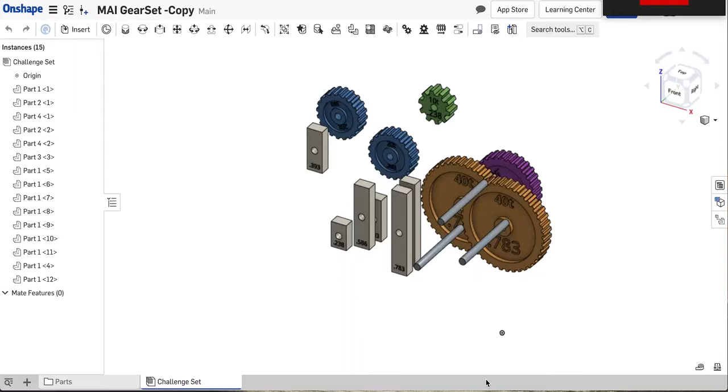Hey guys, we're gonna make a little gearbox here, okay? I'm gonna demonstrate how this stuff works one more time, okay?

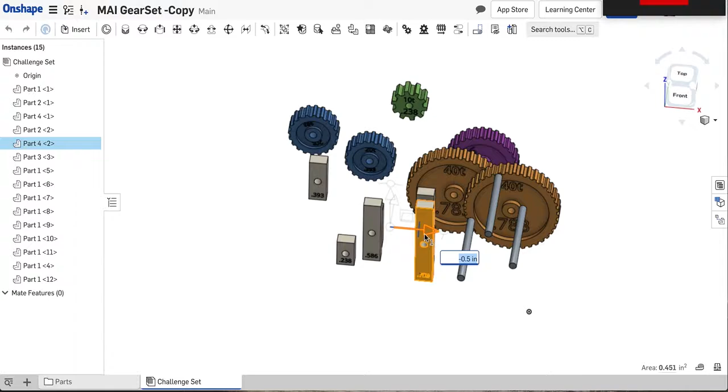So here we go. We got 4 different gears, different colors: 10 tooth, 20 tooth, 30 tooth back here, and 40 tooth. Got a couple axles, couple blocks, okay, that we can use to assemble our parts together. Notice if you wanted more of any part, you can insert those parts, and they're all here. Okay, but I don't think you'll need to for our examples, but feel free to experiment.

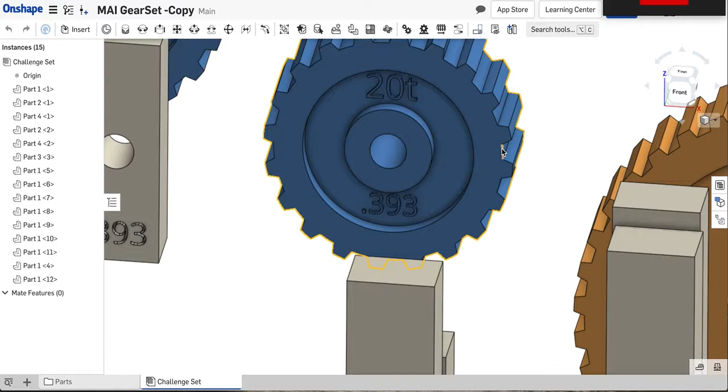So the basic rules are for this type of thing: use the block with the same number as the gear. Remember, the number on the gear is the distance in inches from the center to the root of the gear tooth, okay? And that distance matches the center of the block to the bottom and or top of the block. These blocks are symmetrical. So by using the blocks on the gears and then stacking the blocks, we can build our setup. So let's make a mesh of a 20 tooth and a 40 tooth.

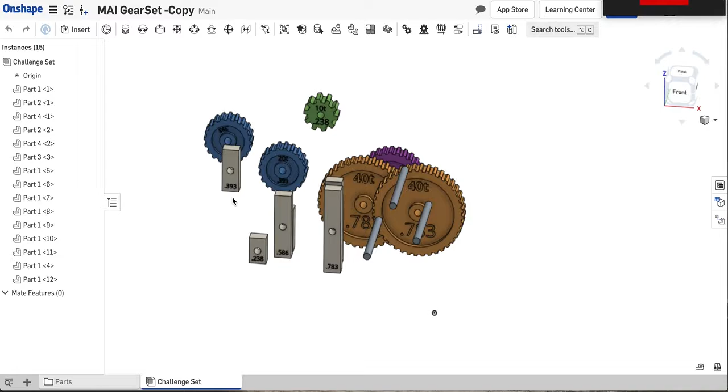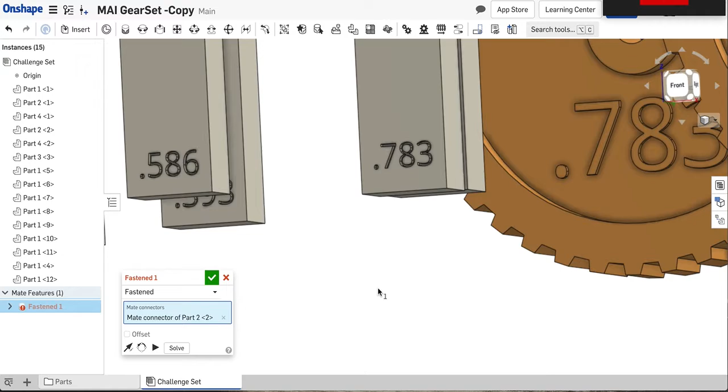Okay, so what I'm going to do first, I'm going to take the 20 tooth 393 and the 40 tooth 783, and I'm going to join 2 of those. So I'm going to fasten the top of the 393 block to the bottom of a 783 block. Okay, and once again, the blocks are symmetrical, so the top and the bottom doesn't really matter which way you go. And I'm going to accept that. And now I have a set of blocks here that are linked.

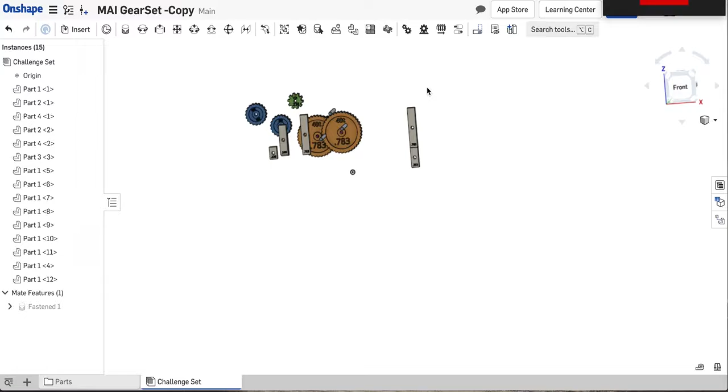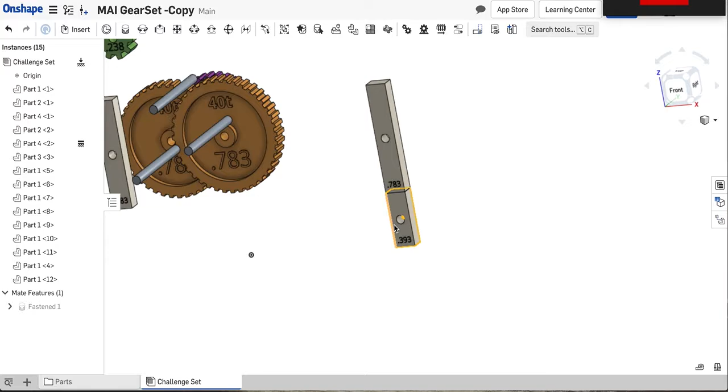And I'm going to move that over, and that'll be our spot where we're building. Okay, I'm going to fix that in place, right-click, fix, so it can't move. Okay, next thing we need to do is we are going to put axles in these holes, and we're going to make those revolute so the axles can spin. Okay, now because we put the 2 blocks together, we know that the distance between these 2 axles is perfect for the 40 to mesh with the 20. Okay, how awesome. So I'm going to revolute.

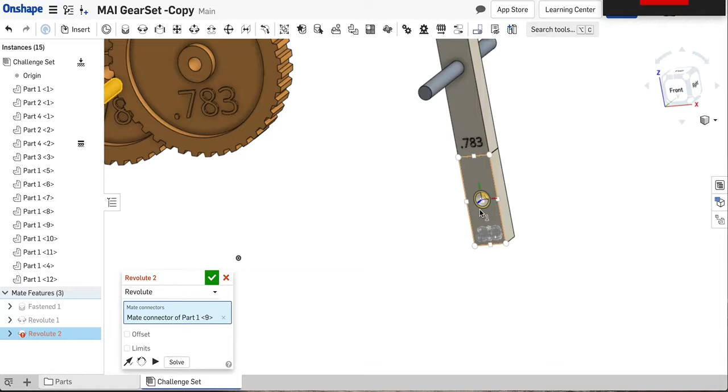Let's pick a center of the axle, and let's pick the front of this cylinder. And that looks great. And I'm going to click the green arrow in the small box to start a new revolute mate. And let's pick the center of the axle, and let's pick the front of this doohickey right here. I want this cylinder. I want to make sure I'm on the cylinder here because, there we go, you never know if you're going to get messed up. So there we go. We got our 2 revolutes. Pretty awesome. And now we're going to just attach the gears.

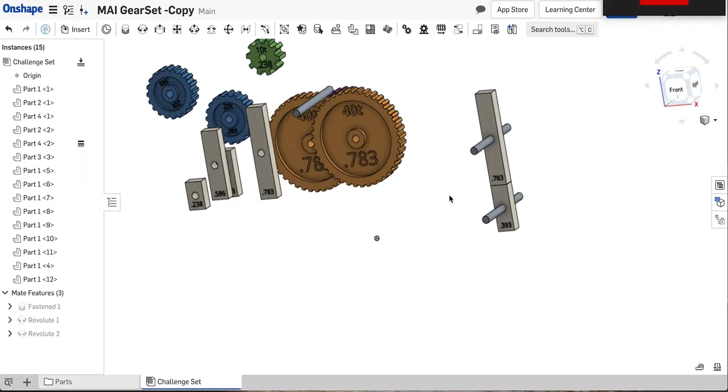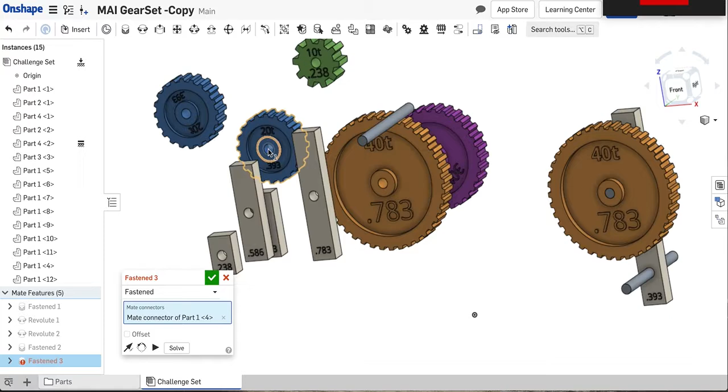Okay, so we're going to fasten the gears because the gears are a tight fit on these axles. These are actual gears and axles that we have in the classroom, and the dimensions are modeled perfectly. Now I'm going to accept that fasten. I'm going to create another. The gears may not look perfect here in Onshape because they're not, but the numbers are perfect and the pieces are perfect. We're going to fasten the front of this gear to the front of this axle. So if you make something, what you make in here can be used in the classroom. So there we have it, folks. We've got our perfect setup.

Now, if you look closely here, these gears may not look like they're meshing right, and obviously they're not, but the roots of the teeth match, and you know, it just comes to the fact that I designed the gears kind of off with the teeth, but the numbers work well and are proven in class. So, all right, last thing to do is make them spin together. Okay, when we spin the big gear, the little one should go, and vice versa.

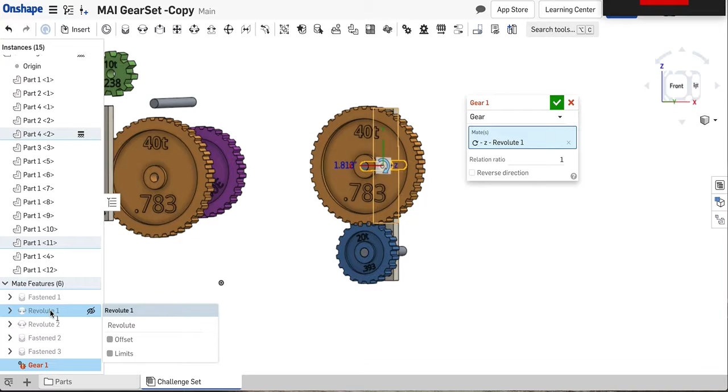So for that, we use the gear relation right here. And what you're going to do is you have to pick 2 mates that you want to relate, 2 revolute mates. So we're going to pick this one, the 40 tooth, first. And then we'll pick this one, the 20 tooth, second. And now you will see the gears spin together. Okay, and that looks pretty awesome.

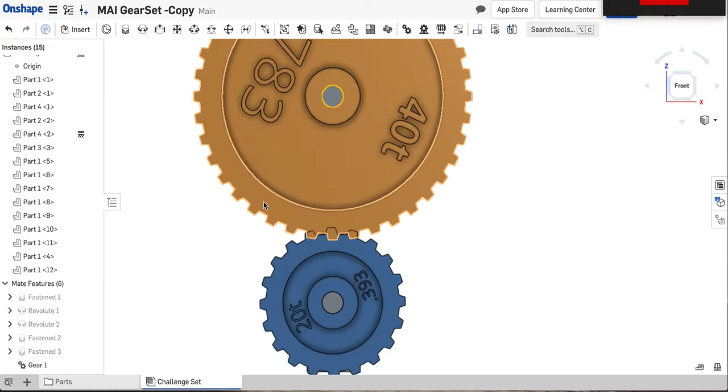Now, I will have you know that it's not right. We're not done yet because you know that there's different teeth on each of these gears. They should not be spinning at the same speed. And if you look closely down here when I spin this, watch the 2 sets of teeth. They are sliding at a different rate. You see how they're grinding through each other? The blue one looks like it's slipping through. They should look like they're exactly touching at the same time.

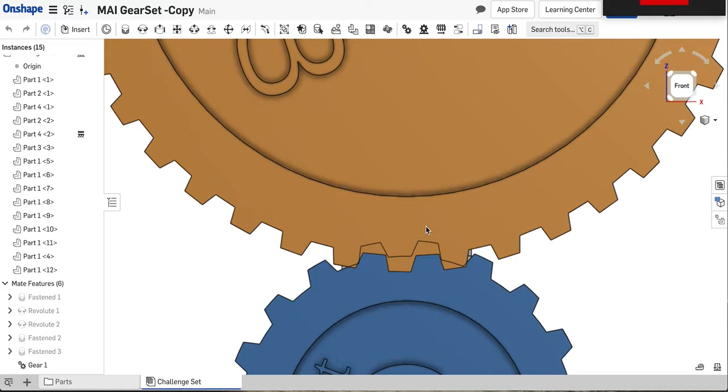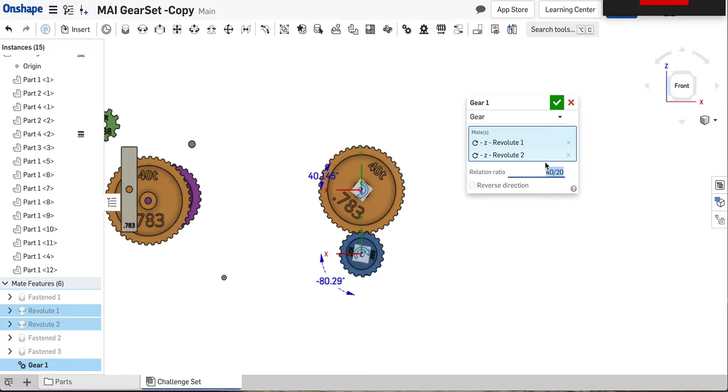And the reason they're sliding and grinding is because in the gear relation, we have set a 1-to-1 ratio. See ratio? We need a 40-tooth to 20-tooth ratio. Okay? So that's 40 over 20. You could put 4 over 2, 4 divided by 2, 2, but you can just put the teeth in there and it's going to work out. Now, watch, when we spin one of the gears, they perfectly are synchronized. There's no sliding going on, okay? They're in perfect synchronization, all right?

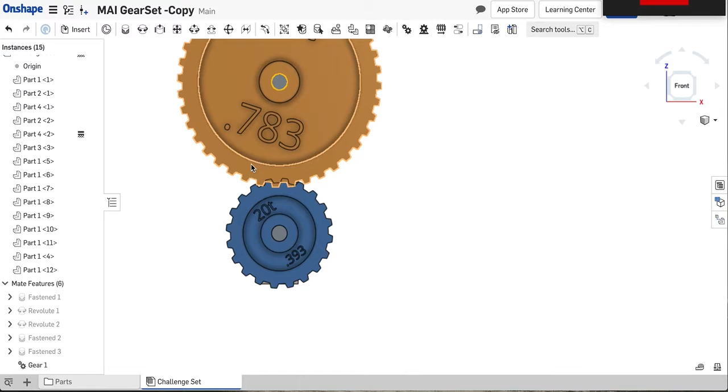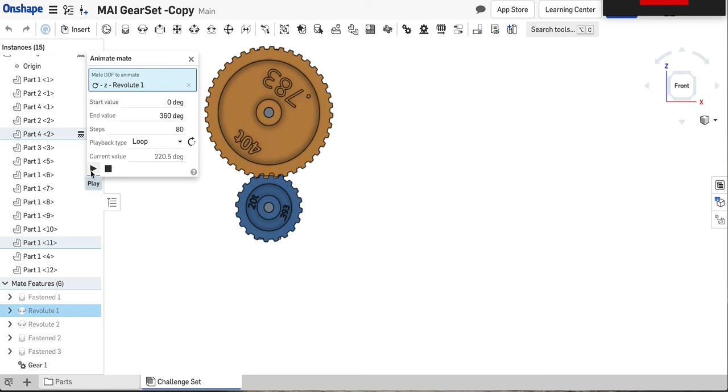And what that gives you is a visual on, if you spin the big gear, the small gear looks like it's going faster. And we can animate this. You can see it a little better when you animate it. Let's have it go 360 degrees in 80 steps. We'll make it go faster. We'll have it loop. See, the little gear is spinning twice for every spin of the big gear. And that looks correct.

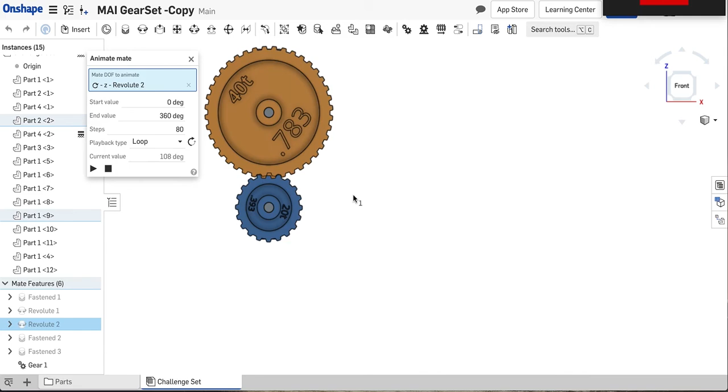Now, if you animate the second one, the small gear, we're going to do the same thing. We'll do 80 steps. That basically controls the speed, and we'll loop it. And it's basically the same. The big gear is spinning 1 revolution for every 2 of the bottom.

All right, so that's how you build the challenges, folks. When you get to the triple combos, that's where you're going to have to think it through a little bit, okay? But I'm leaving you with that. It should be enough to get you going.